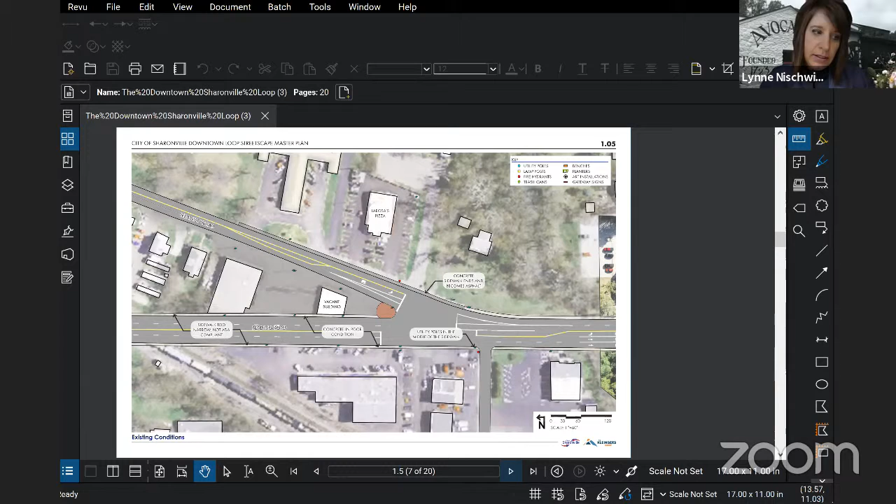So now we're going to get into the existing conditions. These plans with notes reiterate our existing condition summary and plan view. A few things we noticed from our review of the existing loop: obviously the roadway is 3 lanes of one-way traffic. The sidewalk pavement in orange there, those are pavers along the roadway, and they're uneven and therefore present a tripping hazard. The buff color, the tan color, is concrete that's adjacent to it.

The existing concrete around the loop is cracked in areas, and the jointing pattern is not consistent throughout the loop. The curb ramps to cross the crosswalks in the orange areas here are not ADA compliant currently. There's also a lot of overhead power lines and poles along the streetscape, and very large trees near these power lines that shouldn't be placed underneath them. The trees are just too big, and they're not in an organized spacing.

Continuing on to the south side of the loop, regarding lighting, the lamp posts and the conduit need replaced all throughout the loop area. I'm sure you know there are interesting history markers located on the ground plane by the Depot Square. They're round and they talk about the history of Sharonville. It's just they're not eye-catching. It'd be nice to repurpose those in another fashion so they're more eye-catching to the pedestrian.

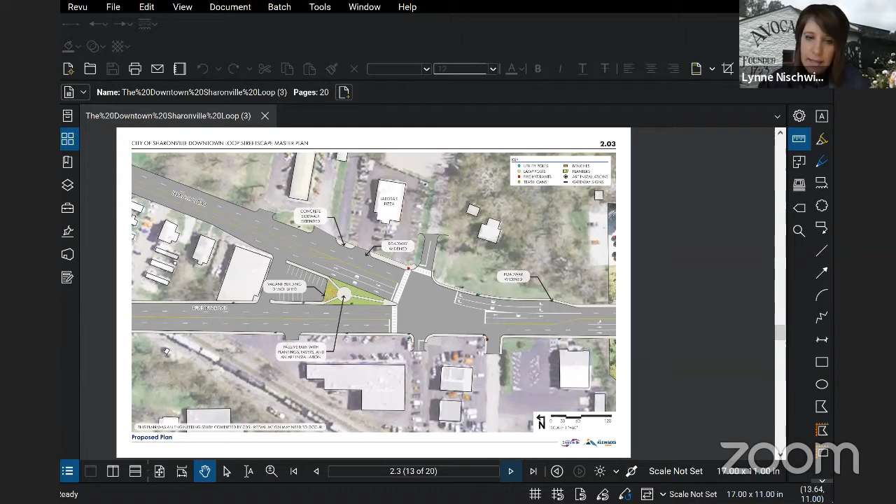So now we're into the main area of the downtown loop here, the north area, the confluence there of Reading Road and Main Street. So like I said, we're showing a road diet, reducing the one-way traffic lanes from 3 lanes to 2 lanes. And as you can see, we're showing parking there on the west side of Reading Road.

These bump outs aren't just to buffer the parking. They can also provide for opportunities to install rain gardens and provide for stormwater mitigation. The rain garden areas that I'm talking about and the bump outs, they're in the yellow-orange color that you see throughout the streetscape. If you look at the top right, you can see there's a bump out with a rain garden. And in there could also be a couple of benches, and maybe the pavement has got a Sharonville logo on it, a couple of planters and so forth.

Now, if we go back to the left side of the drawing, you can see that in the red there, we're proposing to have a gateway arch. Perhaps it's over top of the loop at both ends to really welcome people into the downtown area. So you would go underneath the arch.

We're also providing short street trees that would be appropriate near the overhead power lines. So those are the green trees there that you can see going down the street in an organized fashion. So they would be short to go underneath the power lines. We would also put them in a more organized fashion and also pay attention so that we're not blocking views to businesses. And street trees are really a great way to provide scale to pedestrians and the overall streetscape aesthetic. Let's see here.

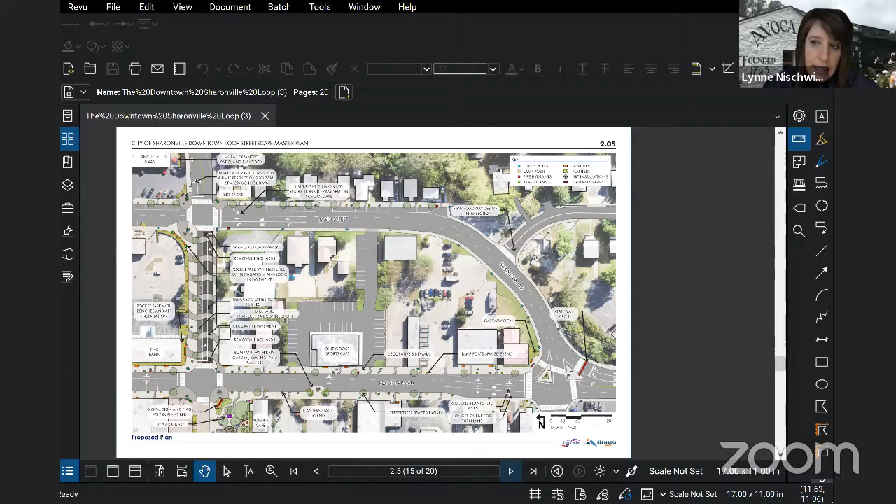So now if we go to sheet 2.05, the southern portion of the loop, we would propose to provide new curb ramps at the intersection areas to meet ADA compliance. We're also proposing to provide the piano key aesthetic crosswalk for the crosswalk areas, and providing the piano key just creates a little bit better of an aesthetic for the loop instead of just painted lines for the crosswalk.

We're also proposing to have planters and benches to have more of a modern flair and incorporate city branding. There could be a logo in the new city benches, or like I mentioned before, we could have logos in the pavement. We would also propose to update the lampposts and the conduit all throughout the loop and space the lighting so it's more regularly spaced along the streetscape.

Now let's focus into Creek Road. Creek Road is over here to the left of the drawing. You can see that there's specialty pavement all along the streetscape there of Creek Road. Our thought was that at either end of Creek Road, there could be removable bollards such that if we wanted to close down Creek Road to vehicular traffic, we could have festivals, which would be a nice idea.

And why you see the pavement like that is, again, perhaps we could brand Creek Road so that it's more pedestrian friendly, and the pavement there just kind of reinforces that. You'll also see on Creek Road, instead of having 3 lanes, we reduced the road from 3 lanes to 2 lanes and added a bike lane on the left-hand side.

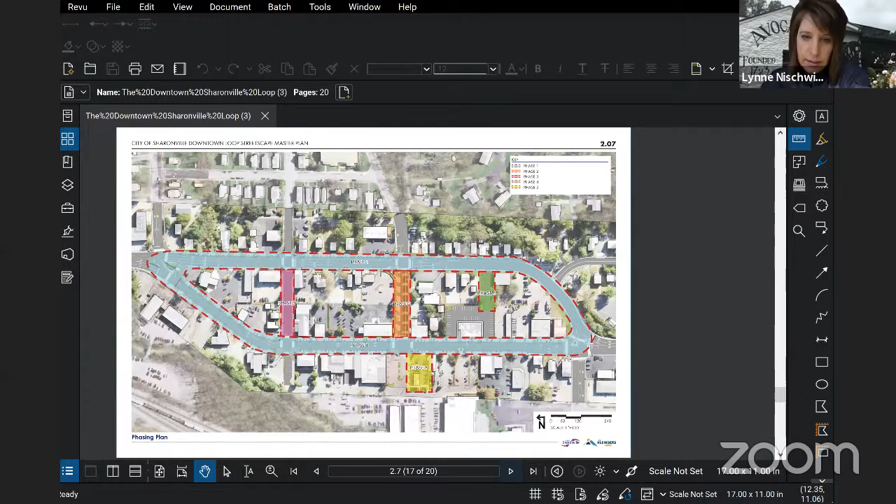Another phase could be the yellow down there, the Depot Square. The orange that's listed as phase 2 is Creek Road. Could be a phase because it's all together. Phase 4 could be in the green there. That could be the new parking behind the Blue Goose. And then we have phase 3 there showing Walnut Street. And obviously those could go in any order as the city council and staff see fit for prioritization.

And then the last couple pages just show some imagery of what we think the streetscape could look like. You can see the top right picture there. That's showing the piano key crosswalk that I mentioned before. You can see the middle picture in the middle of the drawing that kind of shows colored concrete in a curvilinear pattern. That's the thought when we were showing the dark gray curved patterns to go with your Sharonville logo for the sidewalk areas.

And then the bottom middle and the bottom right show you could have bump outs that incorporate rain gardens. It could also be paved areas with benches to widen the sidewalk or rain gardens to promote sustainability.

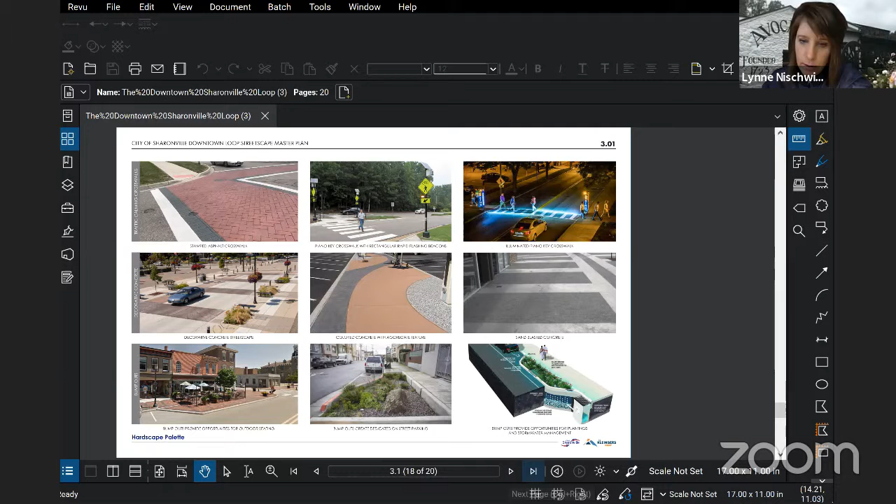And this page here shows how we might be able to brand some of the elements. You can see that we could put the City of Sharonville logo or the Loop logo on trash receptacles or benches or planters. We're also showing the far right there, the light pole that's in front of the administration building that we would propose to put throughout the Loop area to have a consistent theme.

You can see the second picture there to the left. That's the medallions in the pavement that I said are really interesting. It'd be really nice to vertically mount those to have an art installation and something you'd also notice while you're walking through the streetscape.

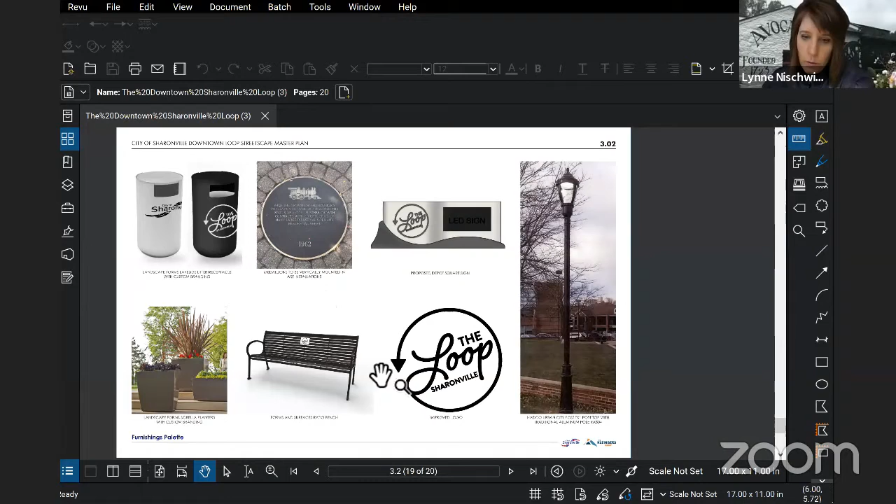So that's the end of the document. Does anybody have any questions? I have a few questions. I don't know if, am I muted? No, I'm good. I have a few questions.

Let's see, first of all, let me ask you about the short trees that you're proposing, Lynne, that go underneath those wires. Are we thinking that not putting any underground wires, the wires are going to remain there? And if so, would you consider removing any of the existing trees that are there now? Oh, yes, I do. I'll go back to the existing conditions. I do suggest to remove the existing trees that are along the road now.

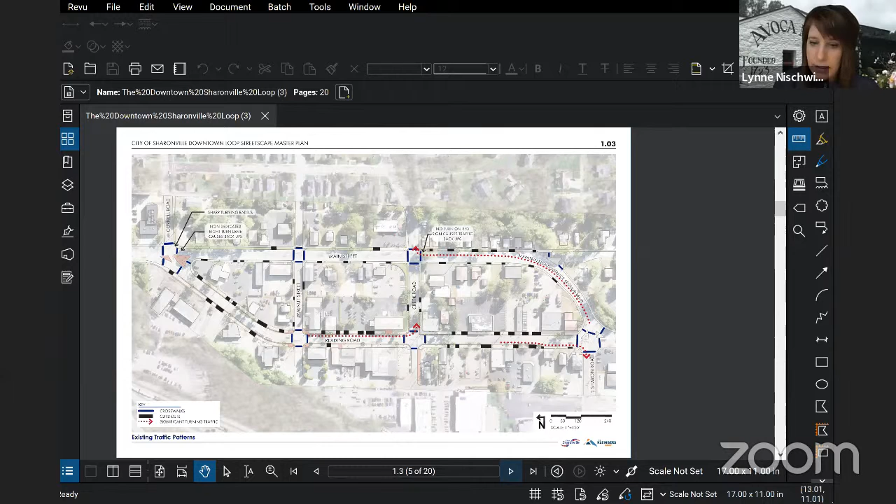They're very large and they're growing into the power line. So yes, I would suggest to remove the existing trees. Okay. And then the wires, you're not suggesting that it goes to underground wires there? That is correct. So we made some calls and we looked into that. It's just really too cost prohibitive to remove those wires and put them underground. It's just an astronomical number.

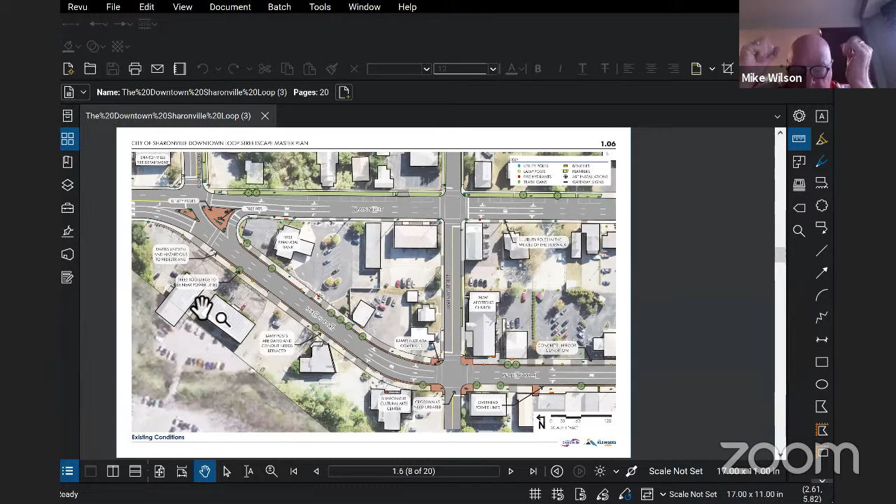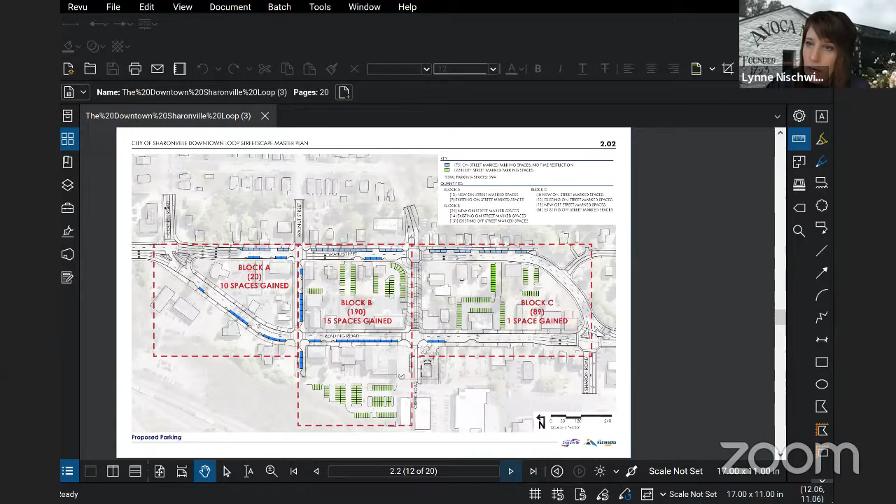Gotcha. The parking that would be created behind the Blue Goose there, would that be dedicated to any particular business, or is it just parking for anyone that's in the downtown area? I'll answer that, but John, you can interrupt me if you want. I would propose that would just be visitor parking for anyone along the streetscape area. All right. Yep, that's correct.

I know Jim Lucas is there. That property has tax issues. It's held up in some sort of probate, and I think he's got someone looking into the city somehow acquiring that once it gets out of all that court stuff. Gotcha. Okay. But yeah, it'd be public, I think, is the intent.

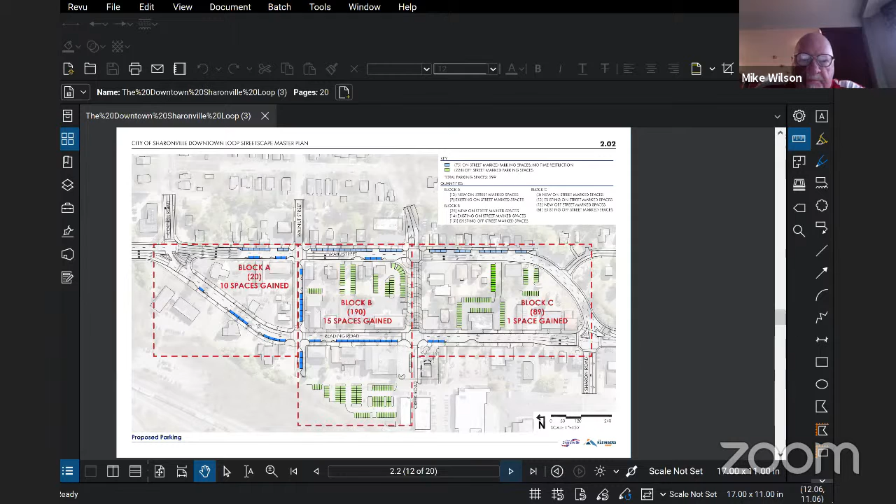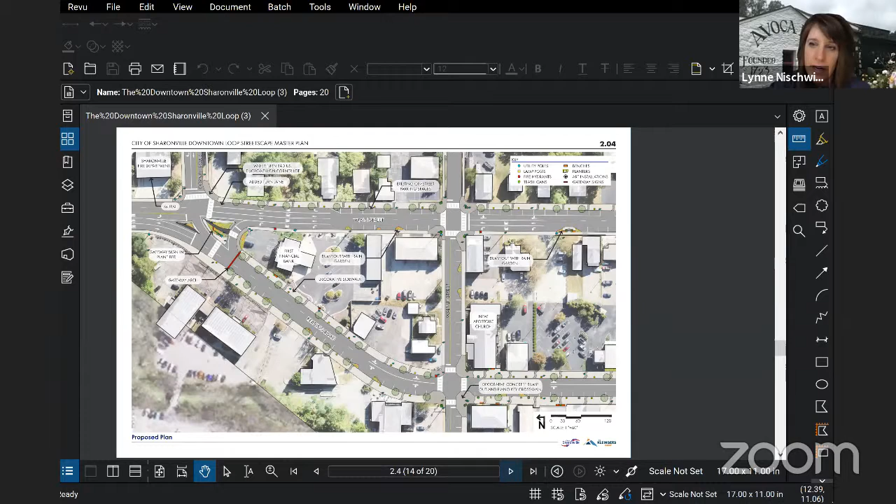I think the design's really nice. The one thing I had a question about was the overhead arches at each end. Lynne, do you have any idea what the cost of those arches are? That's a good question. I think we put a figure in as an estimate. I think those are pretty expensive features, whether it's lighted and what the material is. I think we put a lump sum in of maybe $100,000 for each. So I think that's something that's definitely going to need to be investigated more to see what something like that would cost. So I don't have a great feel of what that would cost, but I like the arches.

As a matter of fact, the reason I ask is because at one time I had suggested that we put an arch on each end of the Northern Lights district there on Chester Road. One at Kemper and then one possibly at Lippelman, right before you get to the school, was my thinking, because that's primarily where the business is going to be. And I was told that they were too expensive for us to consider, but I like the arches.

They definitely have a value of you're entering a new area, and add excitement to it. So I like that part of it myself. So I'm not saying we shouldn't do it there. I'm thinking maybe we need to do it both places, but that's a different story right now.

My other question about this design is I like the rain gardens and those little pocket parks. Very nice features for people that are walking around downtown. As a matter of fact, it kind of ties into something we talked about in our law committee meeting today as far as walking around that downtown area. The one thing that I would ask to maybe look at in addition is this. Since you're going to be putting in light poles in that area, what would it cost to make that possibly a gaslight area and add a little more excitement in the evening?

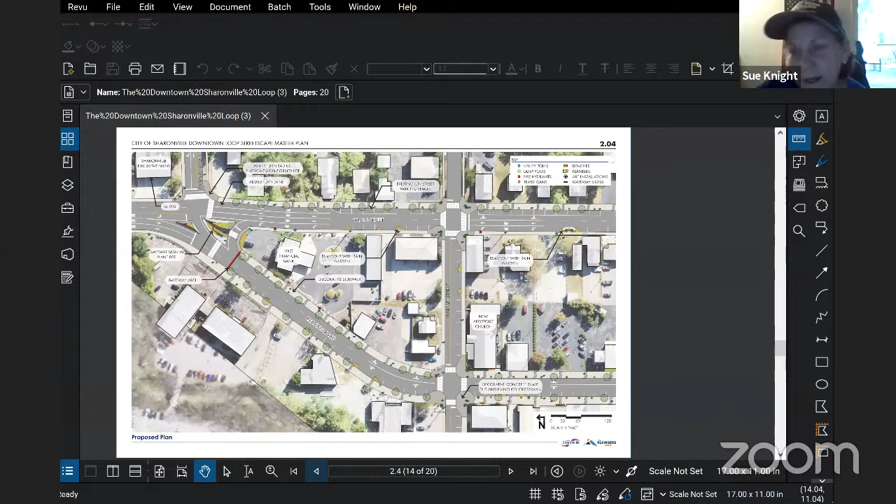I have a question. When we were talking about making it 2 lanes versus 3 lanes, will that create a backup all the way back to Reading Road near the railroad tracks? I mean, it's already wall to wall with 3 lanes, like between 4 and 6 o'clock. Won't that push all those other cars back further and they're waiting longer? I'll go ahead and let Mark answer that question for you.

We did take a look at that. One of the things that we noticed about the entire loop area is that the leftmost lane in each direction really is very lightly traveled. It's primarily only used for vehicles that are turning left onto the side streets within the loop. For the majority of the traffic that goes through there that's continuing from one end to the other, they are in what's currently the right 2 lanes, and they travel through the loop area. So from a capacity standpoint, we are really not losing anything in terms of capacity.

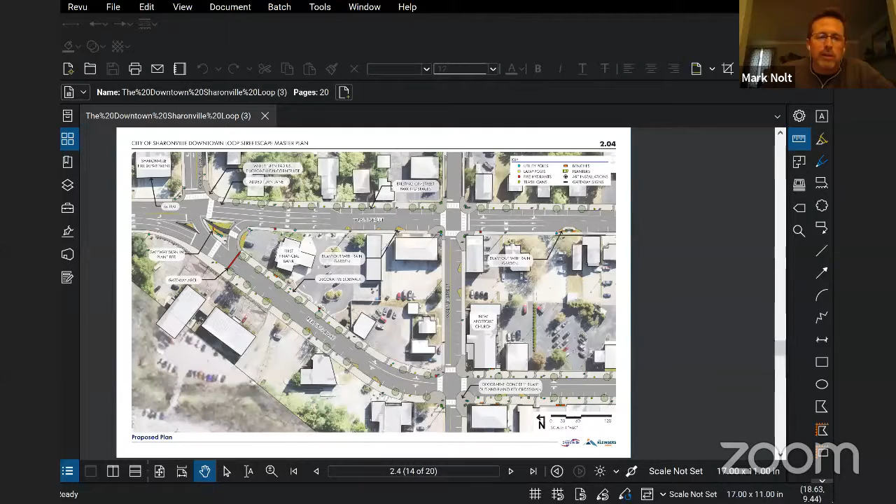In the backups that you mentioned, we did see those as well, certainly during our traffic counts that we did, and also the observations when we were out there. A lot of those backups seem to be generated from the intersection of Reading Road and Sharon Road. There's a lot of traffic at that location. A lot of it is continuing straight, but there's a lot that's turning right as well. And the existing right turn lane onto Sharon Road is very short.

Because of that, there's a lot of times that the right turning traffic demand can't get into that existing right turn lane. And because of that, that traffic just continues to back up over time, which ends up backing up all the way through. So what we found is, with this conceptual design, we're showing that at the Sharon Road intersection, that right turn lane is extended by quite a bit. It looks like it's about 3 times the length of what it currently is.

So that allows a lot more people that are turning right to get into that right turn lane earlier, before they get to Sharon Road. And from the analyses and traffic simulations that we did, that turn lane extension really helps to clear up a lot of the backups that are happening.

I don't think anybody can say that backups would never happen, but from what we're seeing in our analyses and simulations, it seems to be a scenario that does a really good job handling the traffic that's there, even with eliminating that left lane going through the majority of the loop.

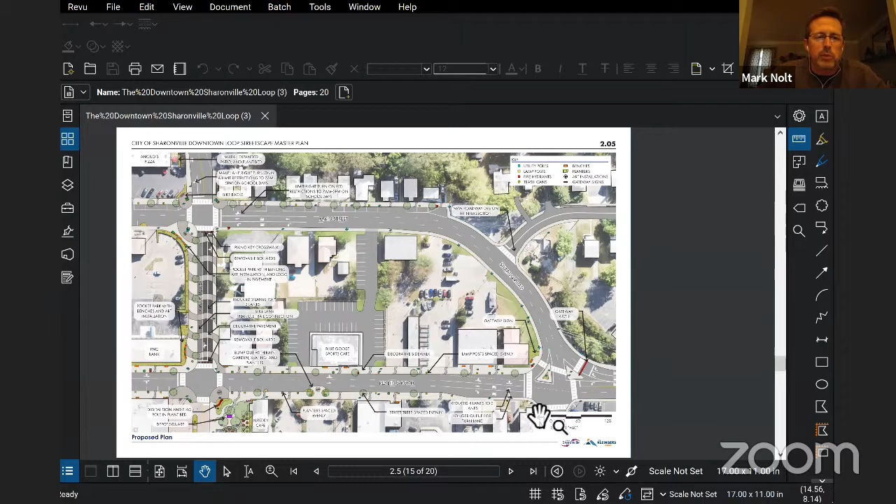It's certainly a good concern, something that was on our mind as well as we got into this, but we really feel like it's a good situation that really tends to help traffic and better provide for pedestrians that are in the area.

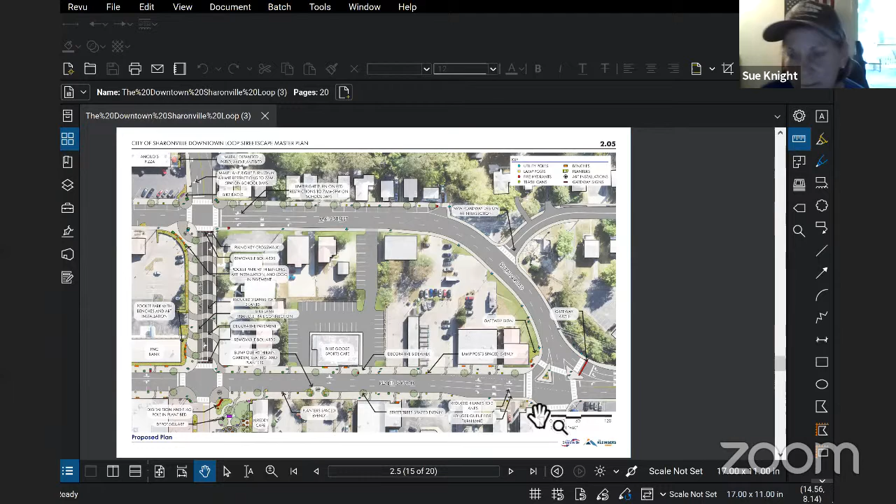Okay. I have another question. The trees that we're planning on planting, are trees a good idea? Because after 10 years, they start bringing up the pavement. You say they're miniature trees, well, these pear trees around Sharonville were supposed to be miniatures also, and they're huge. They're into the wires and everything. So I just question, maybe instead of trees, some other decorative thing. If you walk down, all the trees are bringing up the bricks, but wouldn't that bring up the cement too? They're getting bigger.

That's a concern, but that's why we're suggesting there's really only one or two trees that work in this scenario. You mentioned the pear tree. Pear trees are not small, they're large. Well, when they planted them in Sharonville years ago, they were supposed to be small decorative trees, and now they're a pain in everybody's butt. We're getting a group cutting on Malaire Drive, because everybody's tired of the berries and the birds. So yeah, those are a shade tree, and they grow pretty quickly.

And depending on the variety, they have weak wood, but we would only suggest, if we did want to do street trees, that they would pretty much be that variety. It's about one of the only options to make sure that they keep short and they're not bringing up the pavement. But it's a valid concern. These are short trees. They don't get taller than 15 feet.

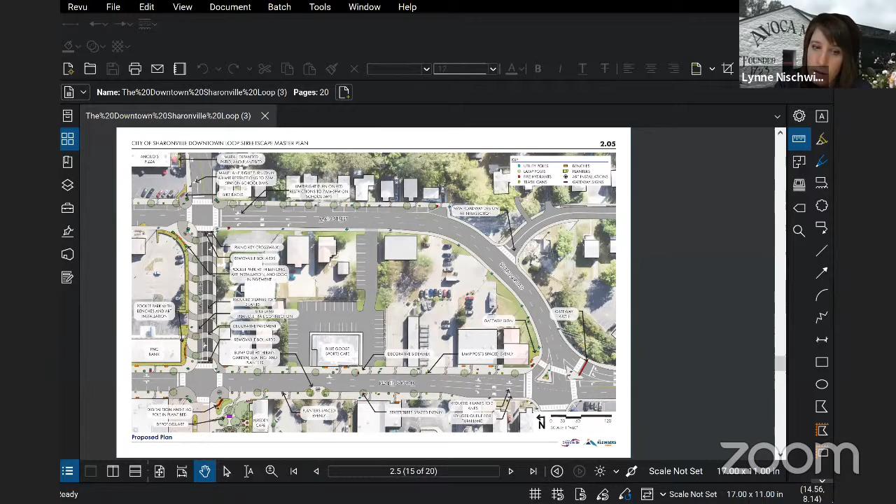What's nice about them is it does create a nice aesthetic along the streetscape, because you do like to have a little bit of shade for aesthetic reasons and to feel nice in the streetscape. So just something to consider. But of course, these are all concepts. So if we decide down the road that we don't want street trees, by all means, we could do something else, like planters with ornamental grasses.

Oh, Lynn, what was the name of that tree? It was a lilac of sorts. Yeah, let me go back to it.

It's actually the only tree that Duke allows underneath any of their poles. That and, oh, the name escapes me real quick, but the ivory silk tree lilac. If you guys are familiar in Fairfield, around their Village Green area, they have ivory silk tree lilacs in their median areas, but they're nice. They flower in June with the white flowers.

I was thinking, interestingly too, Lynn, when we planted those, Sue and I were probably here when they did it. Those were all bare rooted in, and they were just little twigs, and they projected 1 out of 3 would make it. Well, they all made it, and they weren't supposed to bear fruit. They weren't supposed to reproduce, which we kind of struck out. But that was part of a tree planting program that Sharonville had. Gosh, 40 years ago, Sue, long time, 30. It's been a long time, yeah.

Boy, they turned out to be somewhat, well, the first ones were the Callery Bradford pears, which were very frail in the wind and soft wood. Then they went to replace them with aristocrat pears. And they're a little bit better, but really not a good tree. They're supposed to not reproduce, as I said, they're all over everywhere. They're like honeysuckle plants. You know?

Yeah. But no, I did see a few of those lilac trees. I don't know where I saw them, perhaps at Natorp's, and they did look very attractive because they don't get very high. I don't think they would lift up the concrete. I don't think they're strong enough. So that would be kind of nice if that were to work. And they're urban. Yeah, they're very urban tolerant. And what's nice too is they're about the first tree that leaves out in the springtime. So it's just interesting. But yeah, that's about the only tree that'll work in this scenario that we've seen. Yeah, I would agree. I think that would be a good selection.

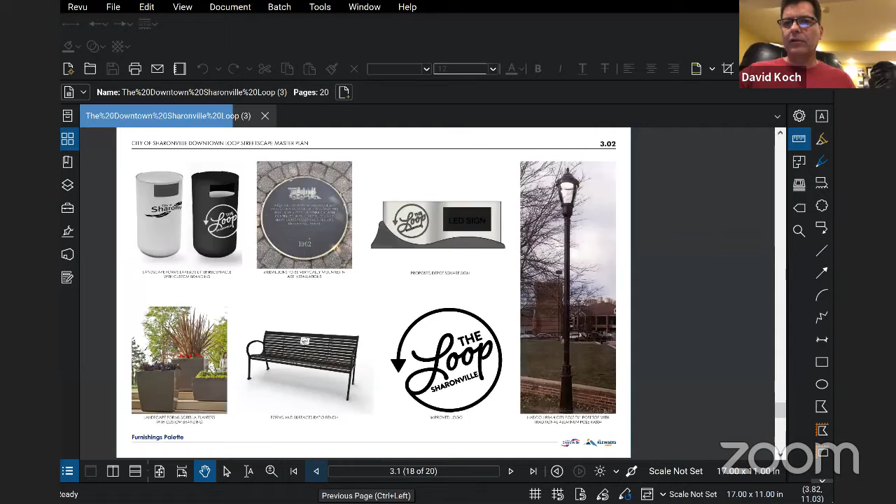It'd help me. Next question is, in front of the Sharonville Fine Arts, it looked like you had a parking spot. And the question I have for you is, is that strictly parking? Could it be drop off only? And did anyone talk to the Sharonville Fine Arts? Once again, they might love a parking spot, or they may hate it and want a drop off spot. Actually, Sarah, I think you talked to them. Do you want to answer the question?

Yeah, so I presented to the Small Business Association a couple months back and spoke with someone from the Fine Arts Center, and they had preferred to have a drop-off area, but like we've been saying, it is a conceptual plan, so it's just noting that we could have a parking spot. So if we wanted to maintain maximum parking spaces, it was capable, but they liked the idea of a drop-off spot over parking. Well, good. Ultimately, they should have the call. It's in front of their business. Me just looking at it, that's why it popped up. I personally would think a drop-off would be preferred over parking. So I'm glad to hear that that's what they would like. I think they also mentioned something about doing like a rain garden or something instead, as an option in front of their building instead of a parking spot.

Okay. All right. Next question I have is, okay, Sue got the one on the street backup and it was answered. I agree with Mike on the arches. I like that. I would like to see them, if we do go with that, have the opportunity to have them lighted and lit the whole time. Maybe there's an option on the lighting they could change colors during Christmas time. But I'd like to see them somehow lit all the time if we go down the road.

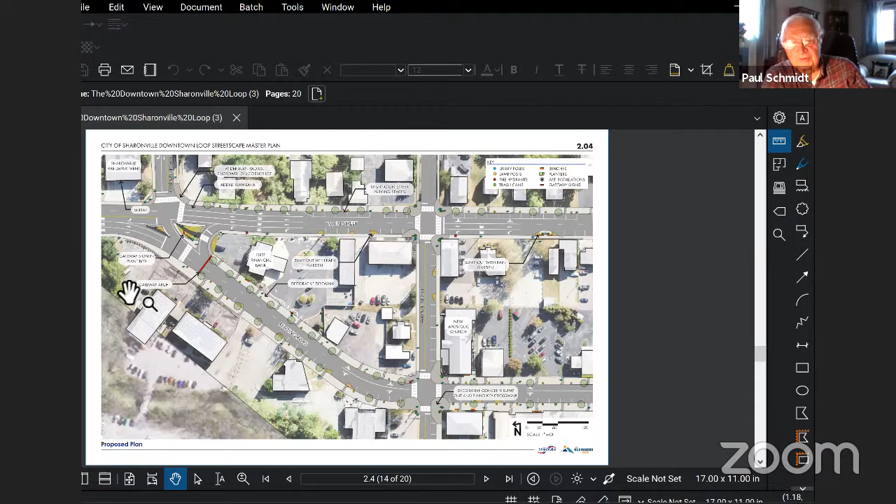And I really do like the idea of jazzing up the two triangles at the beginning as you enter, down by where First Financial used to be. That building is now vacant. I don't know what's going to go in there now, Lynn, because it's kind of designed for a bank, but with the bank foot traffic down so much, I'm not sure if anybody's going to put a branch in there.

I think there's supposed to be a bank going back in there. Oh, is there? That'd be good. I think. I noticed there was a lease sign out front, but I don't know what that all entailed. But that is a good idea if we could jazz those two up a little bit. That would really be good.

And we do have one entrance gate, that daggone railroad tower on Cincinnati Dayton Road. Remember that one? That always gets your attention. So Mike, you are correct. An overhead does get attention.

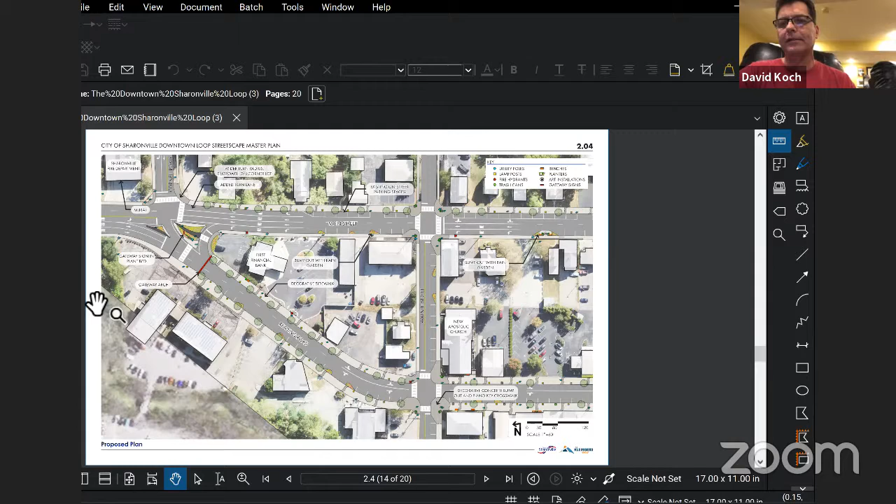Yeah, and I do jump in here. The comment about slowing down traffic, over the years I get hit up on it every year. One person will talk about putting it back to two-way, and their main purpose is to slow down traffic so they can see the businesses. So I like the idea of cutting down the lanes to slow it down some. And that would be once again feedback from the business owners, help them out some.

And just one last comment on that, Dave, this is Paul again. Sarah, you were at the business meeting, and a few of them mentioned if we do put trees there, and Lynn mentioned this in her presentation, they did not want them to obstruct the view of the business or the signage of the business. That was the big complaint, or I should say suggestion, whatever you want to put there.

And I do like the tree concept if we can keep them small. But they said the current ones did obstruct some of the signs and the visions of those businesses. So that was the one comment that came back. And I heard some that are happy the trees are gone too. Oh yeah, they offered to cut them down. Yeah. But it is nice to have something there. I'm not sure what's best.

And I think most of these cities that do have the tree lines, if you go into Europe, you've got the Kalmar linden trees, Unter den Linden in Germany and such. And they really do have a nice green effect if they're coordinated. And Lynn, you made that point very well. Some of those German cities and France, those boulevard streets are just beautiful.

I have one more question. On the one picture on Creek Road, the map, we have bike racks. And I think we need to get more businesses to Sharonville in the downtown area. I can't see people bringing their kids downtown; a lot of them have already eaten dinner, so they're not going to go to the Blue Goose or Already Coffee. If we could get a Deli Depot or an ice cream shop or something where people could walk on the beautiful streets of Sharonville, but there's nothing.

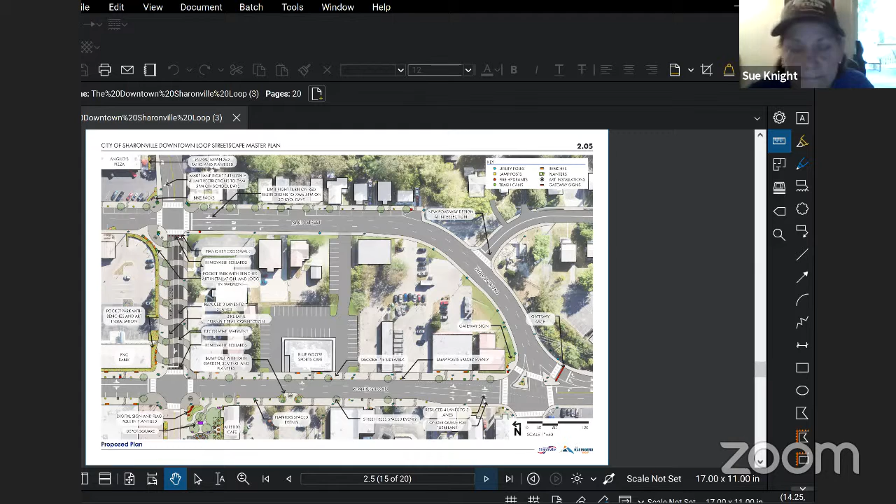That's what I think too. It'll be beautiful, but where are people going to go? Right. Thanks for that comment. So, I think that's one of the goals of this, to improve the streetscape, get rid of a lot of those traffic hazards and missing trees, and to improve the local climate there to attract the business. I think that's obviously one of the goals we're trying for here.

You know, one of the things that Mayor Lovitt used to always say, I think it's correct, I really like the plan because it gives a certain unity and continuity to that whole area, and you have to get that first. And then, as Virgil used to always say, retail breeds retail. You have to have a nice location that makes retail want to locate there. And we really have to pretty up the area, so to say, and really make it attractive for someone willing to, because it's a certain, I think, kind of more, gosh, what it will be down the road.

You know, the malls certainly won't be around much longer. There'll be unique boutiques, perhaps Pleasant Ridge, and some of Pleasant Ridge is focusing on shops that aren't affected by the internet. So there's a whole new potential realm of retail type stores that are going to exist probably. I really like the plan in a sense that we have to do the groundwork. And thank you for allowing me the comments.

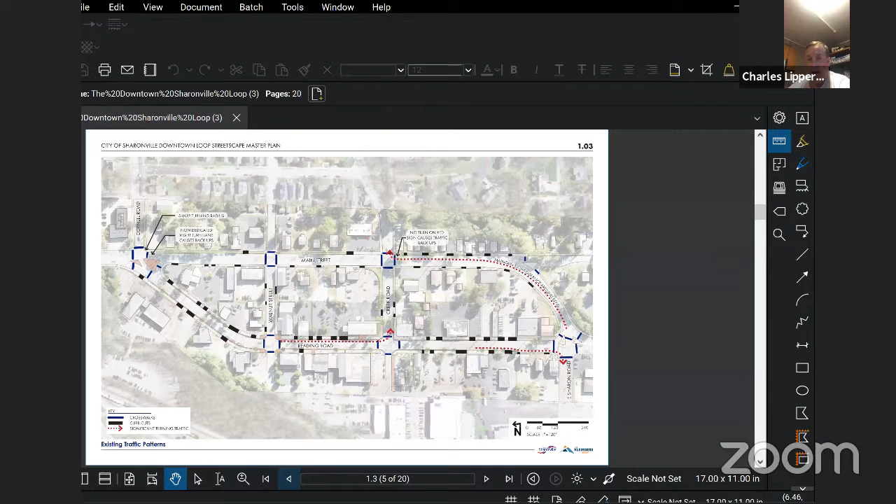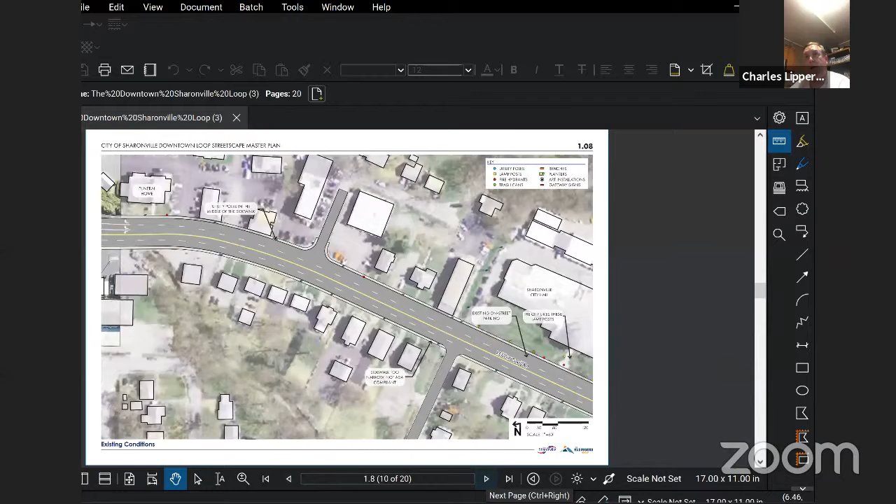So, I'm not a traffic expert, and you say that there's been some simulations, but I find it hard to understand or accept extending that 3rd lane going south on Reading Road and making it the turn only lane onto Sharon. The way I interpreted what you said was that it will make traffic better. Going from 3 lanes to 2 lanes on Main Street, and Reading Road is basically 2 lanes anyway, because there's almost always cars parked on that east side of the road. So that's neither here nor there.

I'm not worried about going to 2 lanes there, because there's on-street parking that messes that up most of the time anyway. But the way I'm hearing you is that going from 3 lanes to 2 lanes on the rest of the loop, and extending that turn lane onto Sharon Road will not make traffic any worse and will likely make it better. Am I hearing that correctly? Yeah, here's what we're seeing. Basically, shifting the 2 lanes that carry a lot of the through traffic to the left 2 lanes.

Once we get down towards Sharon Road, it provides the ability to provide a much longer right turn lane. Once we get to the intersection itself, those lanes start shifting back to their original locations. And we end up at the intersection with nearly the same lane configuration as what's existing. I guess the main difference is right now there's the lane that you can turn left from southbound Reading Road onto what becomes Main Street to go back north, which is a relatively low volume movement.

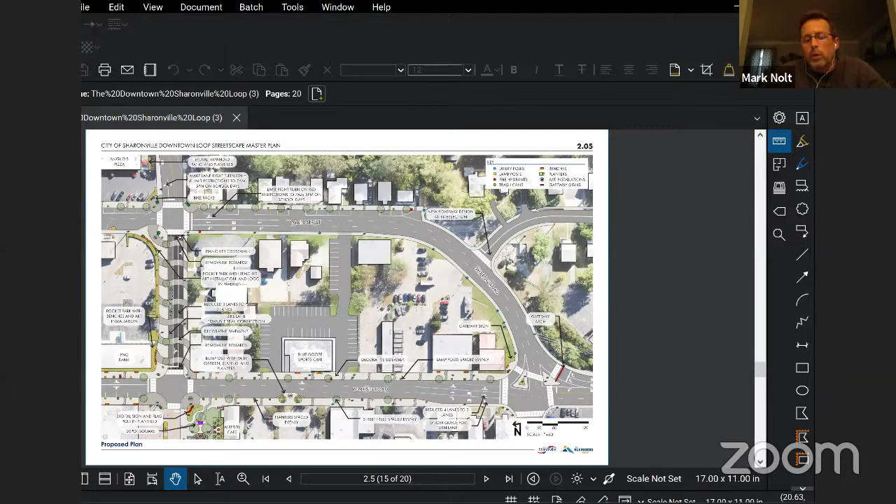But we did collect traffic turning movement count data at all these intersections within the loop area. So we have the full traffic demand at all these locations, and our model does account for the demand at each of the intersections. So the main difference there is providing a much longer right turn lane. And from what we're seeing when we do before and after simulations, the lane configuration that we have here really reduces a lot of the backups that we're seeing in the no build condition. I totally hear what you're saying about the southbound Reading Road traffic.

When you're talking about Block B and Block C, you're basically shifting east side on-street parking to west side on-street parking. Does this plan do anything at all about northbound Main Street traffic, which is significant? That's also a good point, Casey. Like, that is huge. And that's like the big absence on 1.03 from the heavy traffic indicator. Main Street all the way from Weiss Carver to Cornell Road. They're trying to get up to 275 on 42. And I completely understand what you're saying about southbound Reading Road with that turn lane onto Sharon. Does this do anything about northbound Main Street traffic?

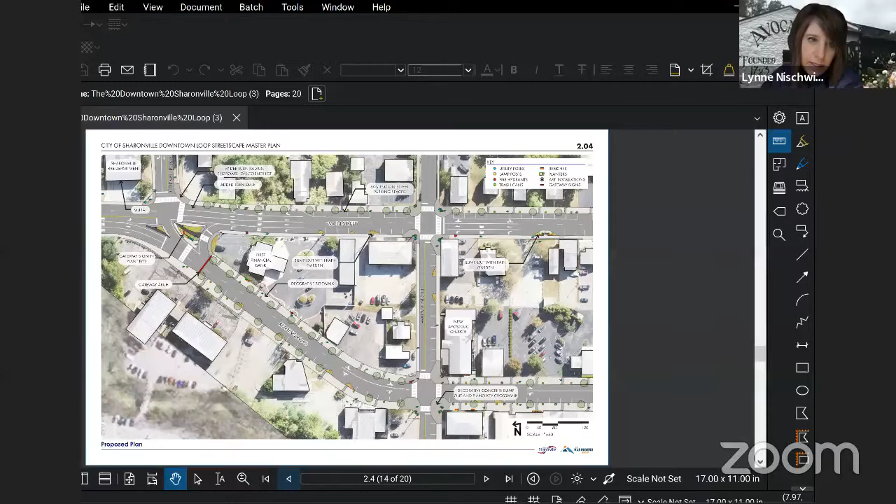So if you look there at the corner of Cornell Road and Main Street, we're talking about taking some of that land there perhaps and creating a right turn only lane, which would encroach onto that corner lot going north as you go towards the Sharonville Fire Department and Cornell Road. Which side are you looking at? The old A&J Flower Shop. A&J Flower, yeah. Gotcha. So sheet 2.04, to create a right turn lane and encroach onto that corner lot to do that. And that way too, Casey, if that gets moved back, it won't be as tight for school buses turning to Cornell. You're talking about making that a dedicated right turn area. Yes. You can see the right turn arrow from Main Street onto Cornell. So it's a dedicated right turn, added turn lane. Okay.

This is Paul again. Sarah, remember when we had the Business Alliance meeting at the Medical Arts? I guess it was the last one we had. That was the one big issue that I heard most comments from, the 3 to 2 was problematic. And what Casey pointed out was really correct. If you come down Weiss Carver and you try to get on Main Street anytime, cars are usually backed all the way up to that intersection of Sharon and Reading Road. It's tough to get on there. I've never figured out if it's light timing or what, but I think if we could do the right lane by A&J, that would be quite helpful.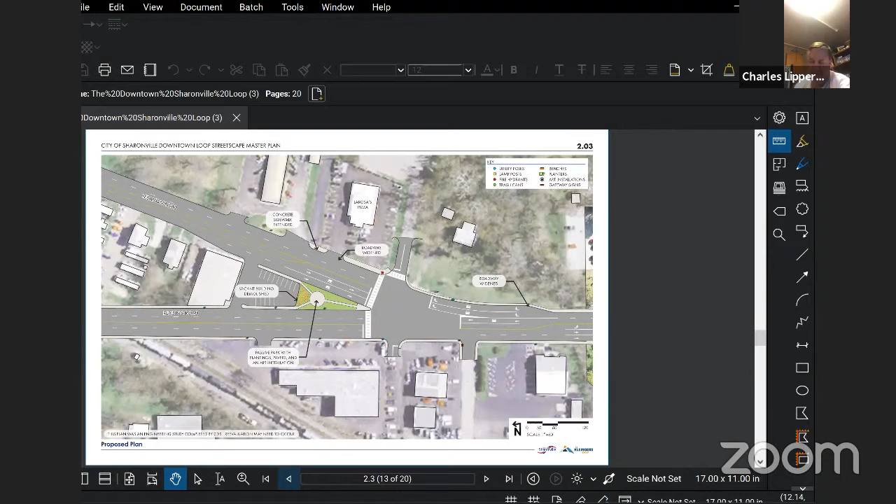To get on 42 like it is now, are you going to have 2 lanes? Is 42 going to be turned into a 2-lane road? Well, you've only got one lane that turns onto 42 anyways from Reading. Right, but at least you have 2 lanes of traffic. You have a little bit bigger chance when you're trying to get over, whereas now you're going to have to get over. Do you know what I mean? I just don't think it's necessary to have a turn lane onto Cornell Road, since I turn onto Cornell Road. I don't see this being a problem.

It's essentially the same condition that you have now in terms of the 2 through lanes going northbound at Cornell. Those 2 lanes would still continue north. It's just that we would have 1 additional lane that you could turn right from Main onto Cornell. I understand what you're saying there, but I'm just saying you're going to push all these cars to go. I don't know. I just know going up 42 is a pain in the butt.

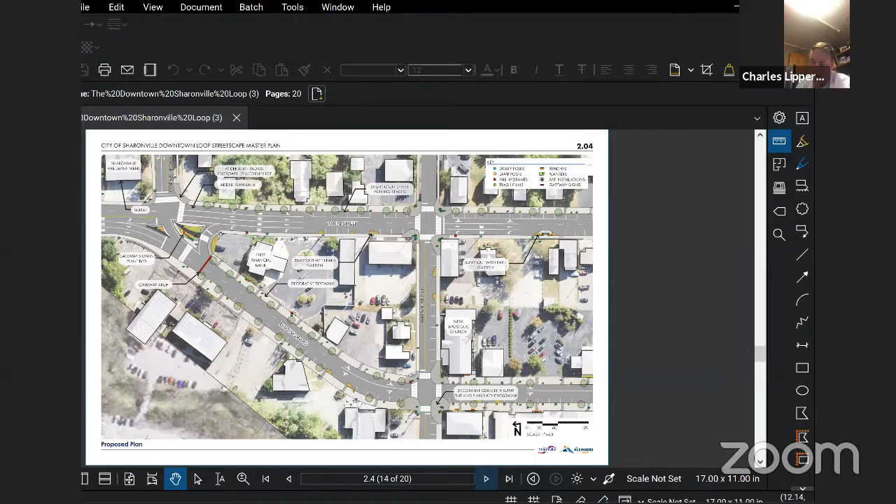The only suggestion I would make in regard to the 3 down to 2 is going northbound on Main Street. You're only talking about gaining 7 parking spaces on the west side of Main Street. And maybe stick with the bump outs on Reading Road, but not do it on Main Street. But unlike Sue, I actually like the right turn lane onto Cornell Road. So, those are my comments. That's it.

Thank you. Well, and I will say these are concepts. So once we get into engineering drawings, we can further delve into the engineering for all of this and revisit the ideas, of course. Right. Thank you, Lynn. I did want to follow up on that. So any major change like that, adding a right turn lane or eliminating a right turn lane, there would have to be a traffic engineering study, because right now we're just looking at this concept plan. 4 years from now, when we're maybe looking at implementing something, there could be different land uses out there on the landscape, different traffic patterns, or any kind of change.

But at least we've got it on the plan. And then as we go forward with either looking for council to fund something or whatever, we can use this document to maybe achieve a grant to do the study. So everything will be studied in a comprehensive fashion before we do anything. But at least on this document, we've got something we can all talk about and debate, and when the time comes, we'd move forward. And like someone already mentioned, if there is a desire to try some of these on a trial basis to confirm how it is going to work, that could happen too. So that's certainly an option for the city. That's why they're called concepts. Definitely. Right.

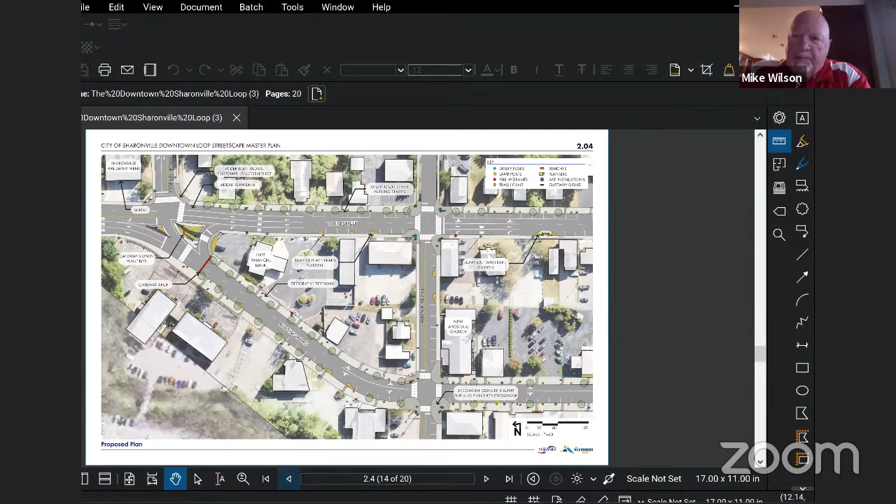I like it. I think you're going to have such a good plan that you're going to have to come up with more parking somewhere, John. Right.

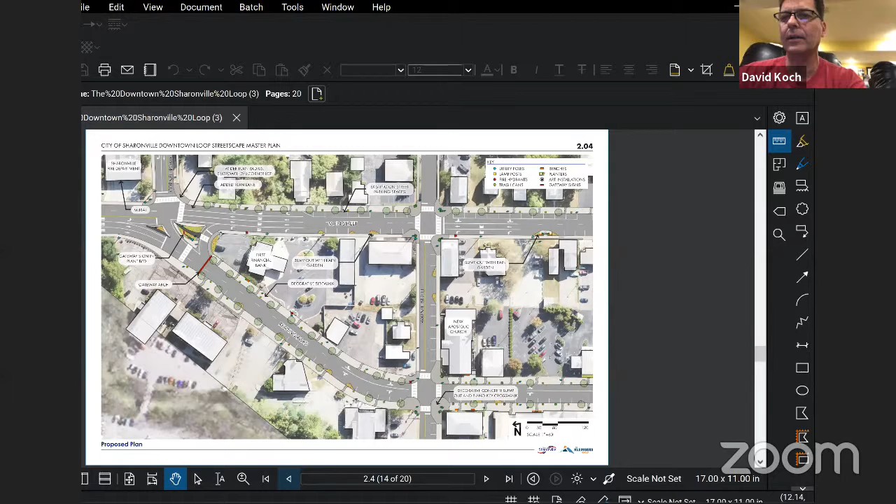I do have one last question. How will you do the waviness on the sidewalk and in the street there on Creek, right by PNC and Game On? Is that something easily maintainable? I'm curious on that. Well, the thought there would be maybe it's all concrete road there. And so, just two different colors of integral colored concrete would be one idea.

Okay. I like the concept. Don't get me wrong. I think it would look really nice. It's just, once again, long-term, how you maintain that look. So yeah, it would be integral colored concrete, so it might fade over time. Sort of like. Okay. All right. Anybody else have any more questions? I'm good. Good deal.

Okay, well, I want to thank everybody on this part for joining in. It was helpful getting ideas from this committee also before it goes to council. There were duplicate questions brought up on this one like in planning commission. So all in all, that's why I asked members of council to be part of this meeting. That way everybody can put their comments in on what they think. It is a concept, and that way, down the road, whenever everything gets approved and when this does happen, at least our concerns will be listed to whoever may be doing this whenever this program starts. So that's all I have to say.

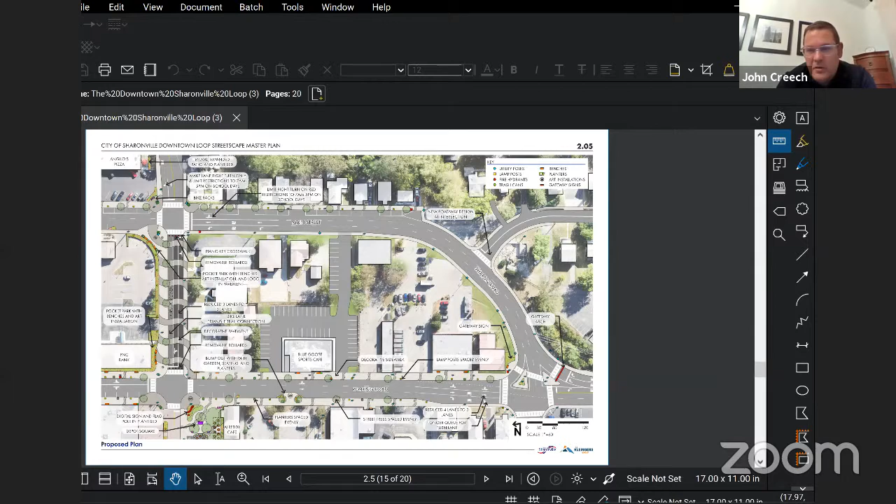Yeah, this is, again, just a concept. We got all of our ideas, we'll work through it, bits and pieces or the whole thing, depending on finances and council approval when the time comes. But we've got the ideas and concerns, and every little phase will be engineered and designed. You don't take this document and just go out and hire a contractor to do the work. So there'll be a lot more smart people looking at this, skilled in design and engineering, before anything happens.

But we have to start with this concept. And I think at least Planning Commission was happy with it. And the consultant, we're happy with them. They've listened to us every step of the way. So we just look for this committee to give us the thumbs up so we can move it on. All righty. My committee, do we give John the thumbs up? I do. So do I. I'm a yes. I'm a yes also.

All righty. I told Jim Lucas the only thing he's not able to get out of this plan is the statue of him. He wanted a statue of himself. So I told him that's not going to happen.

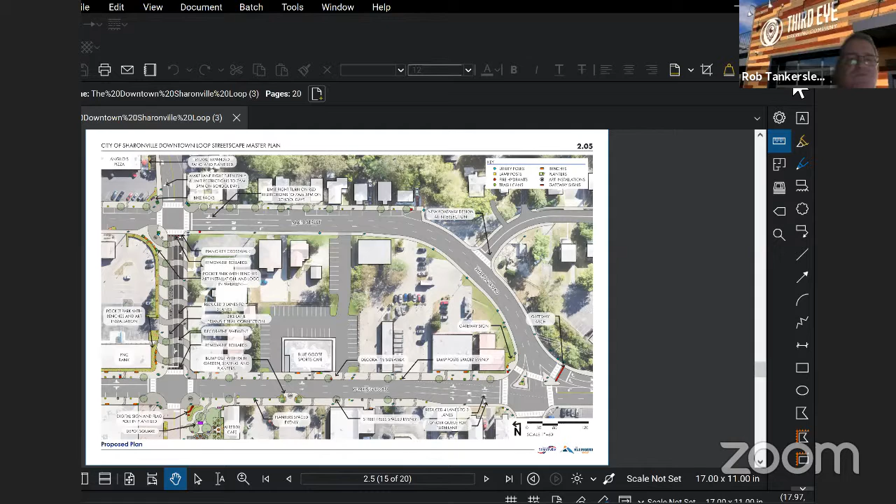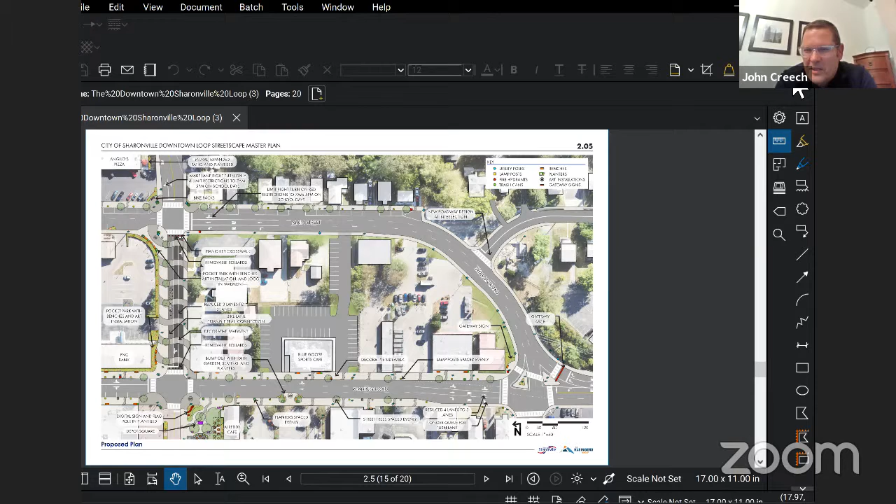But other than that, John, you've got the board's approval. So there we go. All righty. Sounds good. If there are any questions or anything, you can email me tomorrow or whatever. We'll get back to you. But we appreciate everyone's time this evening.